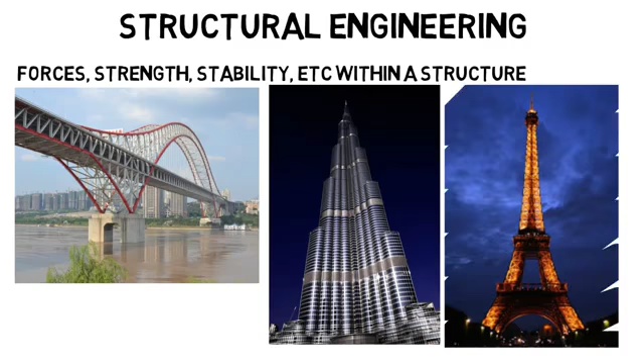So first, structural engineering is about calculating and understanding the forces, strength, stability, and so on within a structure. It could be a bridge, a skyscraper, a landmark, or even a spacecraft or aircraft. Remember, these structures are very heavy and need to support their own weight so that they don't collapse. Now this subfield is the most math intensive and has lots of physics.

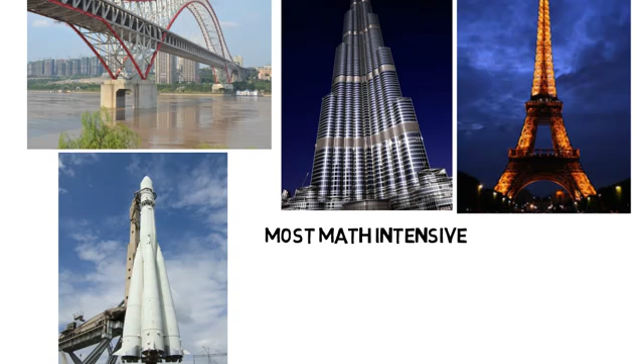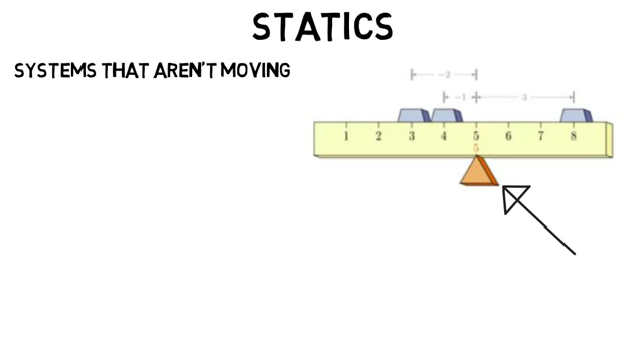All civil engineers will take a class called statics, which is all about the forces and systems that are not moving. In basic physics, you may have done a statics problem, like where does this support have to be for the system to be totally balanced and therefore not moving. You summed all the forces which equaled 0 and all the torques which equaled 0. And that's the basics of statics.

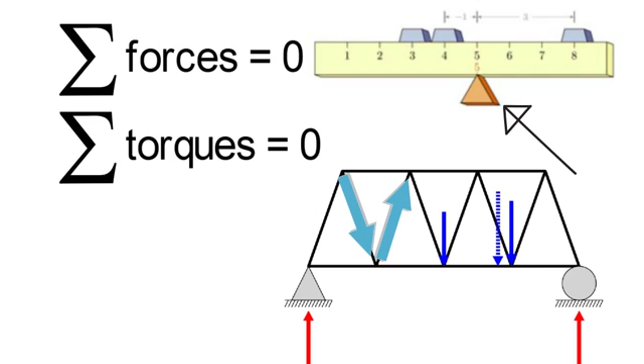So if you're looking at the forces within a bridge or truss, well, the same principles apply, but now there's just more to it. The weight is straight down as shown in blue, all the beams exert forces on one another, but the sum of them is equal to 0, and the torque sums to 0 as well because the bridge is not moving. And it's of course even more complicated than this, but if you enjoyed that kind of basic physics you see above, then you'll likely enjoy the statics and physics you see in structural engineering.

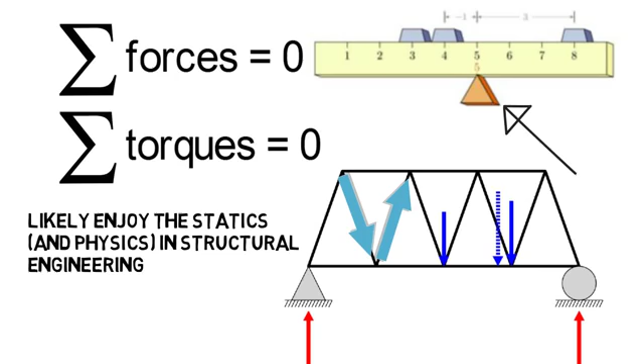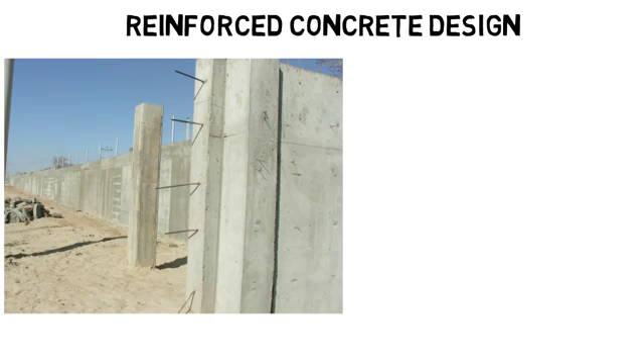So that's just a very simplified explanation, but now let's dive into some of the classes they would take. One class that would be important for structural students is a reinforced concrete class. In concrete structures, they reinforce it by putting steel beams in the concrete. We can't see those beams, but here, before construction is done, you can see them sticking out. Or you can see a lot of them on these unfinished columns.

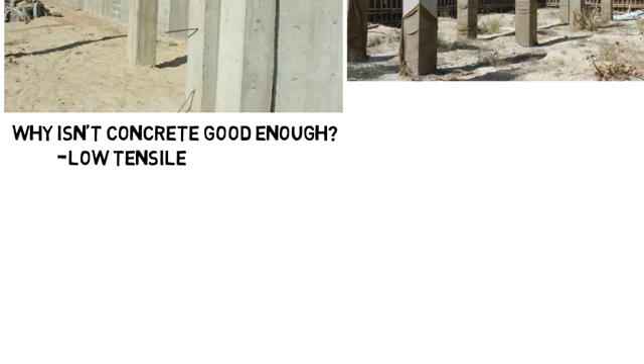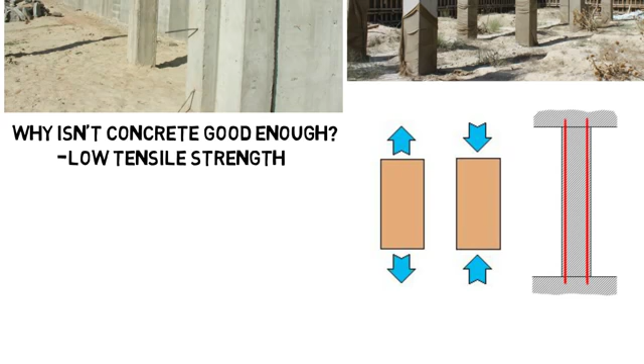So why do they do this? Why isn't concrete good enough? Well, concrete alone, once hardened, has low tensile strength, as in it does not handle being pulled very well. However, it's okay with being compressed. But to counteract that low tensile strength, they add steel beams and pour wet concrete, which hardens around them, and then those steel beams have high tensile strength to counteract those types of forces on the structure.

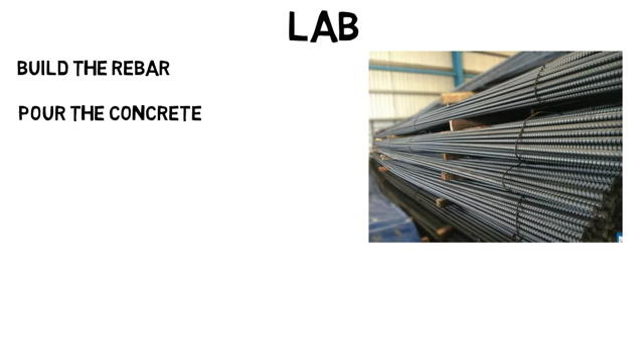So in a lab for this class, you might build the rebar, or the steel reinforcing rods, pour the wet concrete onto them, then once it dries, use a machine that holds the beam on both sides, then apply forces in the middle and keep increasing the force until the beam breaks or cracks and starts falling apart. That force being applied is sent to a computer that tells us the loading on the beam so we can collect the data and get the properties that we need.

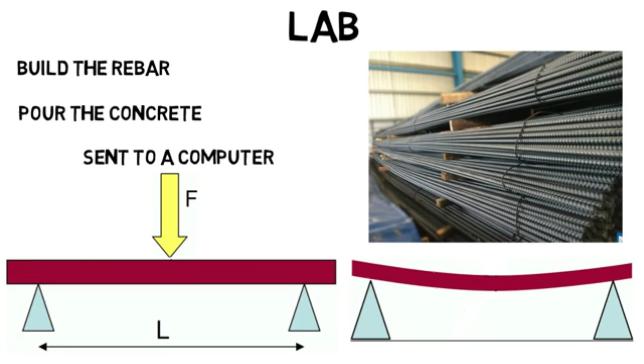You could take structural dynamics as an elective class. Dynamics is about moving systems, unlike statics. So this is one of the few classes where motion is included. So whether it's wind or an earthquake that shakes a building, you need to know how that motion will impact the structure itself and all the forces within it.

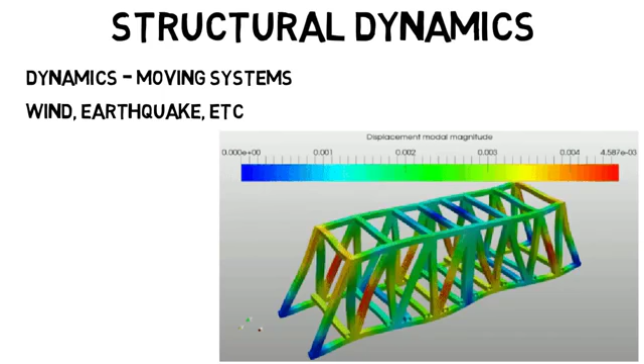I've shown this animation before, but mostly for mechanical engineers as it's a vibrating system that they could analyze, but civil engineers could get into this as well. They have to make sure their designs can stand up against any type of movement the structure may be subject to. You could take an elective class on seismic analysis, which is specifically about calculating the responses of a structure to an earthquake. Or one on bridge engineering, which would be a class on highway bridges, materials used, distribution of loads, and how forces are spread throughout the structure, and so on.

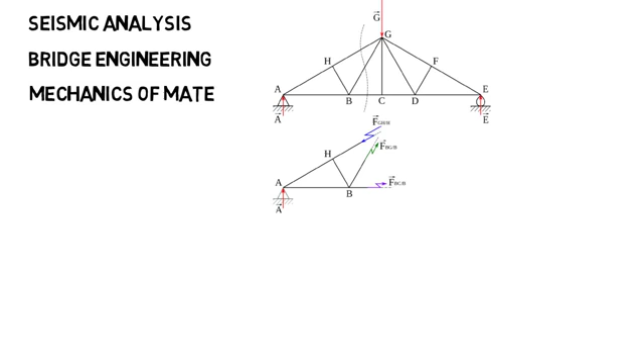Mechanics of materials, like how twisting and bending a beam or column causes it to become internally stressed. Timber structure design, which is about analyzing properties and forces within wooden structures, and much more. See how even if you choose structural engineering, you could still take many different classes from the other structure students? It's a very broad major, but hopefully you really get the idea by now. Lots of physics in this discipline, but mostly statics or forces in structures without movement.

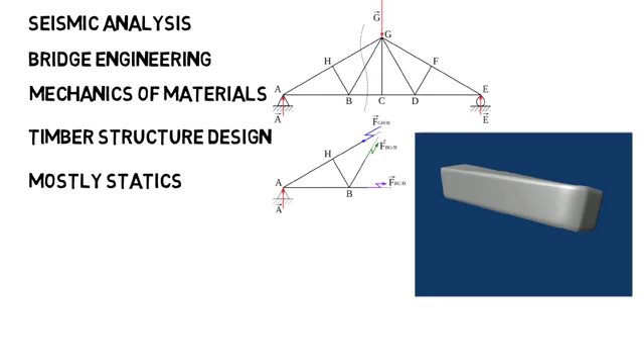You may still have to do hand calculations, but most of the rigorous analysis you learned in school will be left to the software.

Now let's move on to geotechnical engineering, and you'll already see how different these disciplines are. Geotechnical engineers are concerned with the behavior of earth materials like rock and soil, but the main focus is soil. This may seem odd, but you'll see how important this is.

The structural engineer can do everything right to make sure the building will stand up, but if the geotechnical engineer messes up and you put a structure on soil that can't withstand it or is uneven, the building could fall, sink into the ground, or even lean to one side, probably the most famous being the Leaning Tower of Pisa, which was a result of soil issues.

Then they also have to consider the foundation of the structures that are being designed, like should they have a shallow foundation or a deep foundation. You may not realize it, but our houses and all the buildings you see have foundations that go underneath the earth to keep the structure as stable as possible by transferring the weight from the structure to the earth.

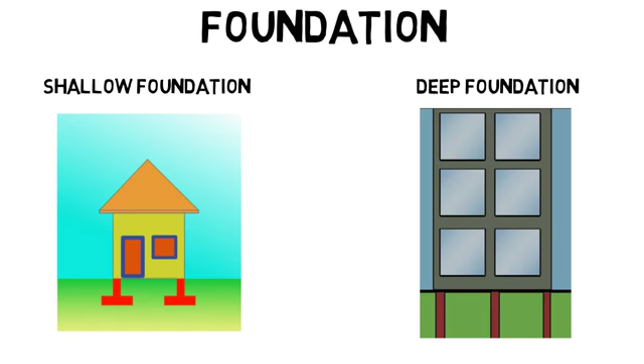But geotechnical engineers rely heavily on testing. So a lab you might see in college is to go out as a class and collect soil samples around your university and bring them to lab. You would have to classify it, like is it sand, gravel, clay, etc. There are many soil types, and you may have to look at the grain size or how it reacts to water.

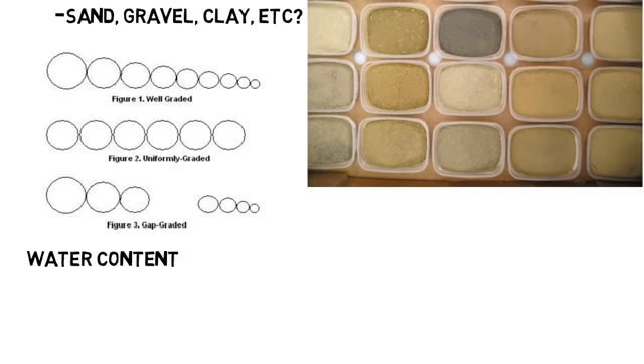You determine its water content by analyzing the sample, which will be comprised of solid soil, water, and air of different masses and volumes. But most importantly, you'll measure how the soil will react to mechanical loading or to different forces acting on it. So you might perform a triaxial test, for example.

Too complicated to explain for this video, but essentially you put the soil in an enclosed area and apply a force or load to the top which pushes down on the soil. Then pressure sensors measure the pressure at different points to see how the soil is being affected.

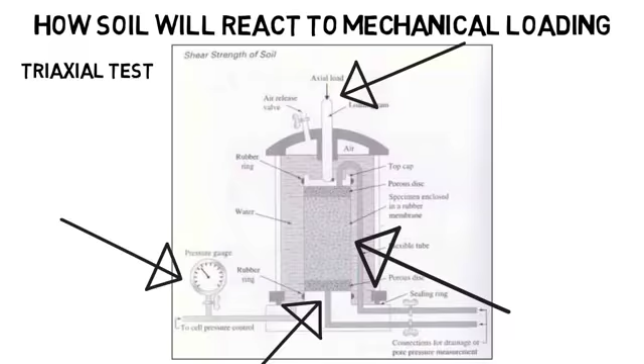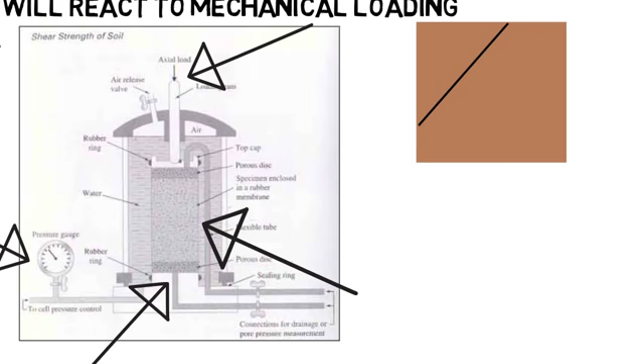If you imagine a square sample of soil and you add a force to the top, the soil can fail along some weak plane. Basically, the weight overpowers the friction holding the soil particles together, and the soil will start to slide, which is known as shear failure. Its ability to stand up to this is known as shear strength, which is one thing that the triaxial test on the left tests for.

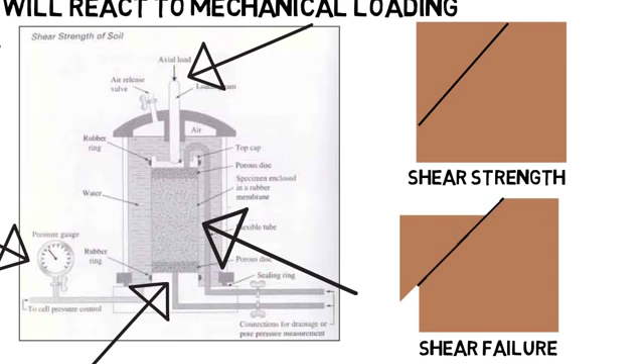And this leads us to what a career in geotechnical engineering could be like. You might be the person who goes out to the field where a structure is going to be built and collects soil samples all around the area for testing. Or you could do testing at the field.

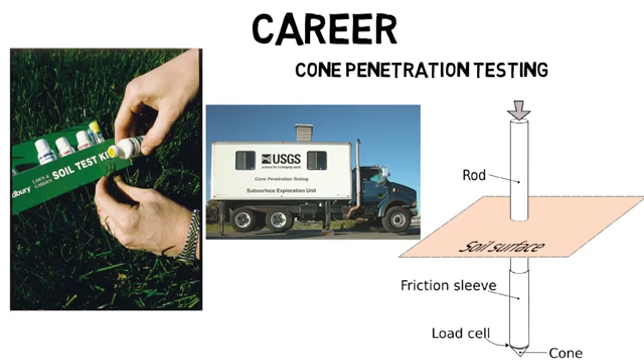One of the most used tests right now in this field is cone penetration testing, where a large truck goes out to the field which has all this equipment on it, and a cone is pushed into the soil, and the pressure will be monitored by a computer on the truck as it moves through the soil into the earth. Based on the pressure, you can analyze the soil mechanical properties.

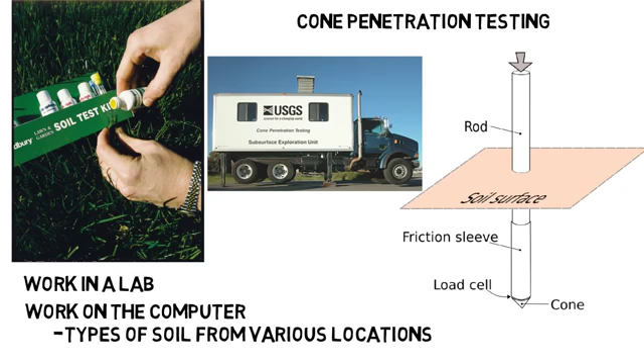Or maybe you could work in a lab where you would do the testing on the soil after it's been collected, like I showed with the triaxial test. Or maybe you could work on the computer and input the different types of soil from the various locations at the site so you can digitally lay out the area that the structure will rest on. So you could be in the field, in the lab, or on the computer.

Your elective classes could include geotechnical earthquake engineering, which would be like learning the dynamic behavior of soil as opposed to the structure itself. Then slope stability analysis and how to safely design structures on slopes. An example would be an embankment dam. Analysis of deep foundations, where the structure goes deep into the earth for a stronger support, like for skyscrapers. And of course, there are many more classes.

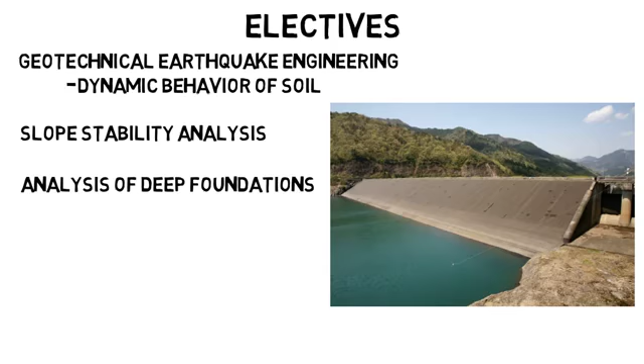Now let's move on to water resources engineering. This is about the design of systems to manage human water resources. They can work on a water treatment facility, designing dams, pipelines, channels, canals, and so on. Maybe you have to design a storm drain system in the event of a large storm. Where is all the water going to go and how will you get it to the ocean efficiently?

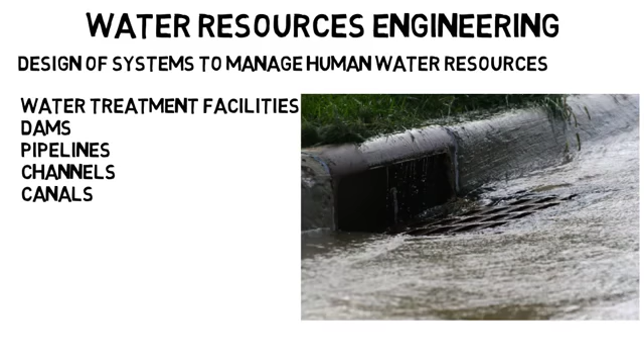Or you could design a canal, which is an artificial waterway to transport water for irrigation, or it can be used for ships and boats. Or you could design a culvert that will allow water to flow under a road or trail or some other obstruction.

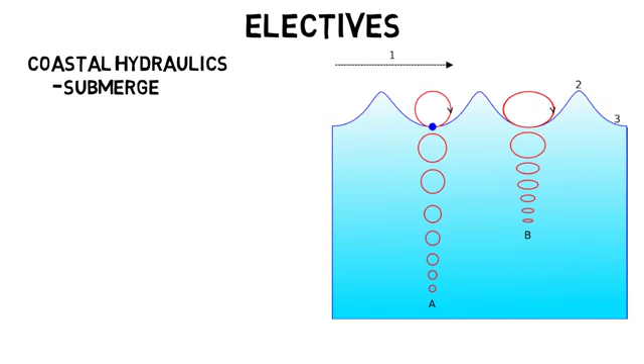Elective classes you could take include coastal hydraulics, where you learn about ocean wave propagation, submerged pipelines, seawalls to protect human habitation, and so on. Or open channel hydraulics, which is about fluid flow in an open channel as opposed to a closed channel or pipeline.

And last is transportation engineering. This is about safe and efficient movement of goods and people. These are the engineers who design streets, roads, highways, railroads, public transportation systems, and even airports.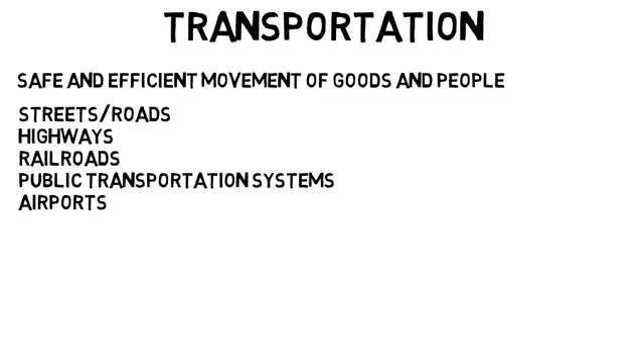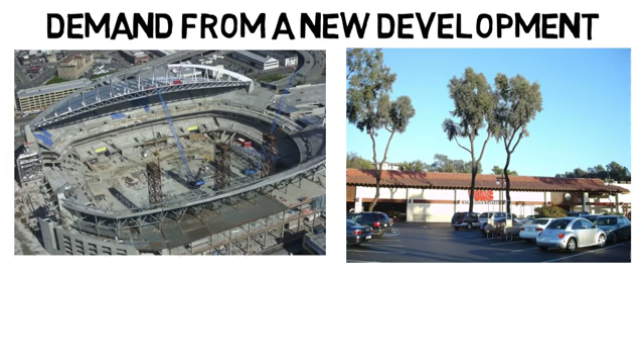So maybe this engineer has to look at the kind of demand from a new development, whether it's a new stadium in your city, all the way to a new grocery store in a new location. This is going to cause new types of traffic throughout the area. The engineers would try to optimize how the new development impacts existing traffic.

They would look at data from other similar places to see what kind of traffic they get, then try to make improvements where possible. It could be simple like adding a bus stop in the nearby area, all the way to expanding the roadway to allow for more traffic.

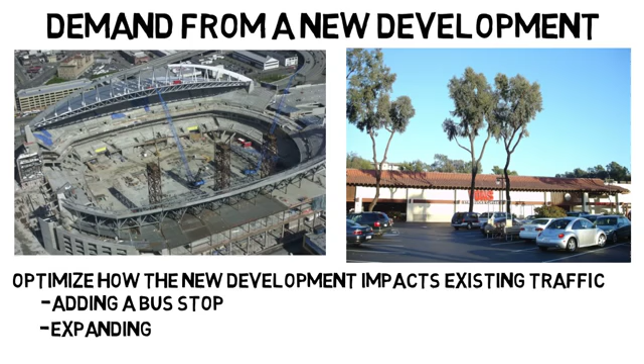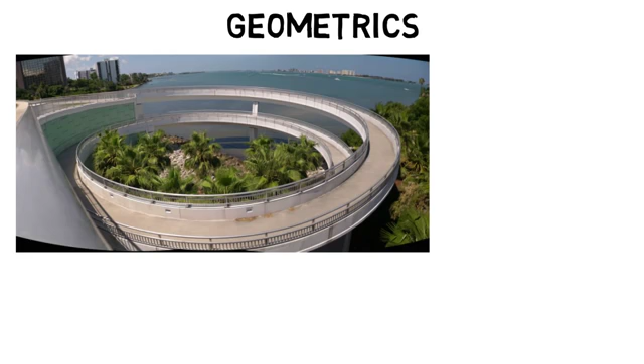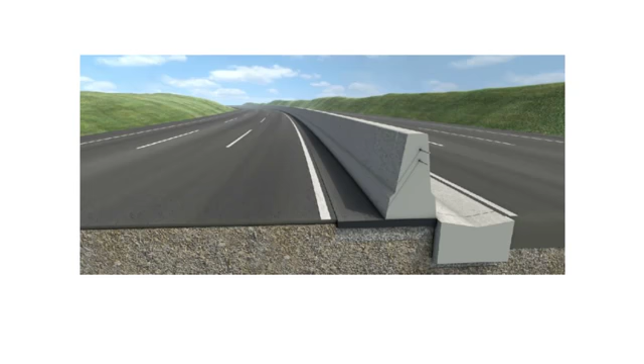They could work on the geometrics of the roadway, such as what radius of curvature does an off-ramp have to be for a car going 55 miles per hour so the tires won't slip. Or if they're going up an incline, the driver needs to see far enough ahead of them to stop if there's a sudden obstacle. Or what do the cross sections of a freeway need to be for the lanes and the shoulders to accommodate the amount of traffic that's expected?

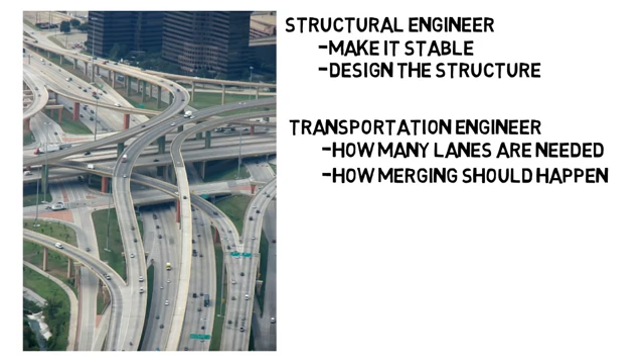Or let's say a highway interchange is being designed. A structural engineer would make it stable and design the structure itself, but the transportation engineer would determine maybe how many lanes are needed for the interchange based on traffic, or how the merging should happen to maximize safety. They make sure that the layout is designed to maximize traffic flow and safety rather than the physics of the structure itself.

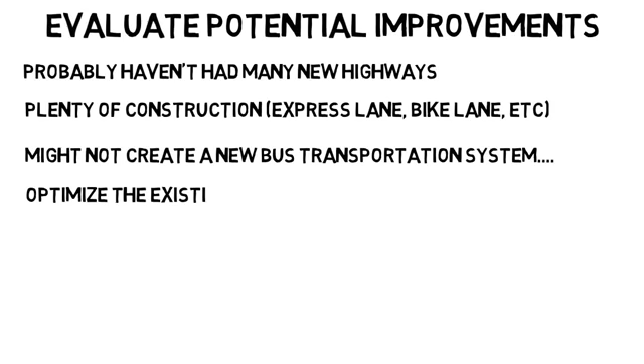Often these engineers evaluate potential improvements to cities in terms of transportation rather than create a totally new design. As in, you probably haven't had many new highways put into your city in the last few years, but there's probably been plenty of construction, whether it be adding an express lane or a bike lane, etc. So they might not create a new bus transportation system, but they may optimize the existing one. Maybe they take data from how many people get on the bus, how long the bus takes to complete its route, how long people are waiting for the bus, and so on to optimize the route, the amount of stops, and more.

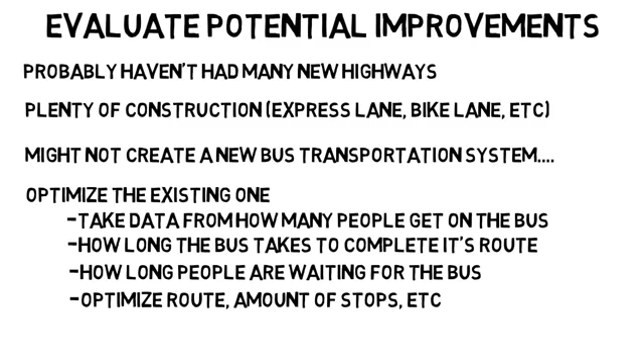Your career will also likely involve a good amount of computer work. You might have to create a layout of the new lane, off-ramp, bridge, or whatever you're designing on AutoCAD, which is a very important software for civil engineers. Or you could use software to analyze and simulate traffic.

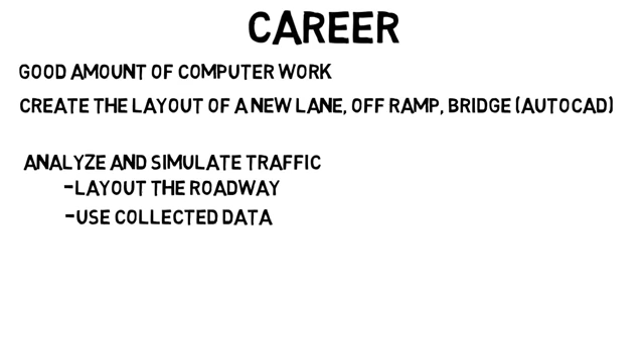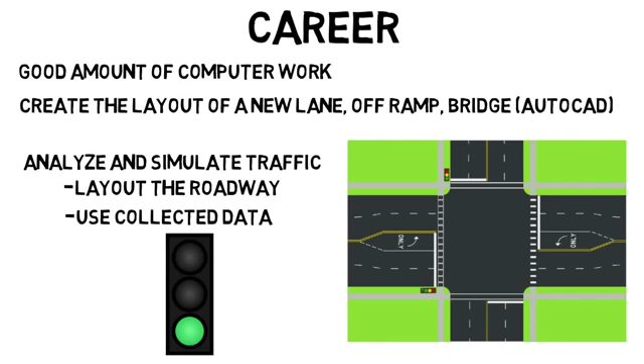You could actually lay out the roadway of a city and use collected data of traffic during different times of the day and simulate new additions. Like you could add in a stoplight somewhere and see what the new traffic would be like. Or you can make a minor change, like make a certain stoplight stay green for just a few seconds longer and see how it affects traffic on those streets.

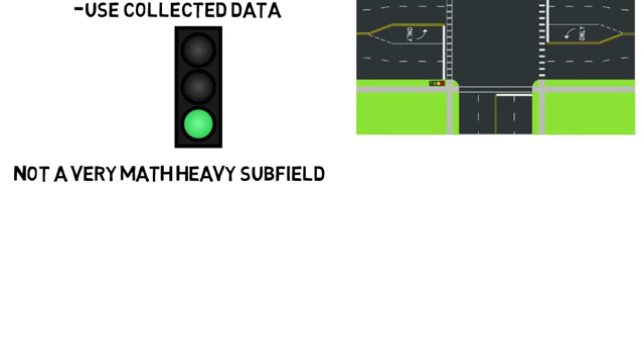And just note, this is not a very math-heavy field. In fact, it's probably the least math-intensive of the 4 subdisciplines I've talked about. It's more about taking data and analyzing it. Even when I talked about the radius of curvature and how fast someone should be going, you won't use the coefficient of friction and do circular motion physics or anything like that. You use even simpler equations to get what you need.

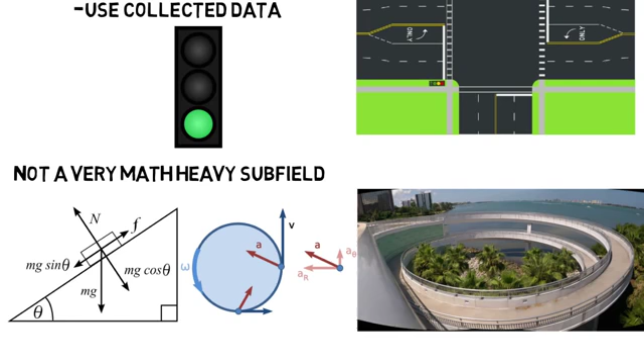Now that's all the main subdisciplines of this major, but there are some final thoughts I want to include. If you're watching all this and are more interested in the artistic aspect of building and structure designs, then architecture will be better for you. Architects deal more with the floor plans, spatial concerns, and the shape and design of the buildings. They have to have an understanding of structures and physics, but not quite as much as a structural engineer.

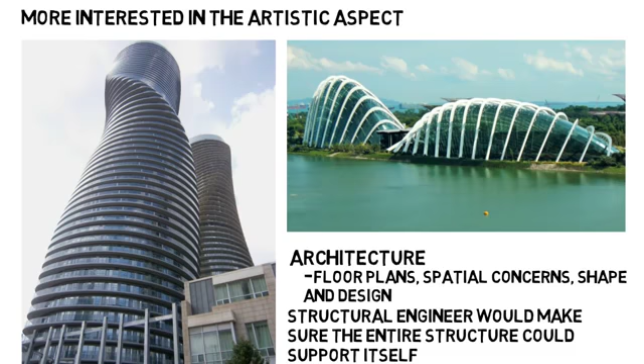They would hand off their design to the structural engineer, who would really make sure the entire structure could support itself, and they would deal with more of the technical work. Then, if you want to be the one who puts on the hard hat and does all the hands-on work with the machines and physically builds the structures, then construction will be better for you.

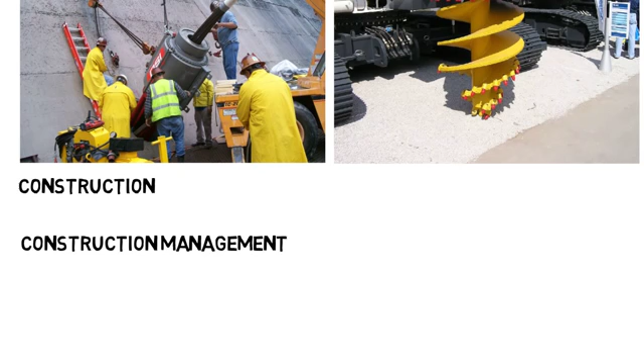But then there's also construction management, which you can still get a job in as a civil engineer. Construction companies will hire civil engineers because of their technical background. Construction is the hands-on part, but construction management is more about guiding the construction, putting together schedules, budgeting, and figuring out how all the pieces will come together.

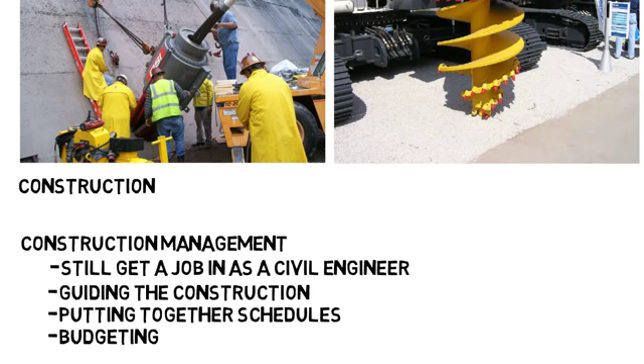And according to the Bureau of Labor Statistics, the average salary and the number of jobs in the United States for these 3 majors are all pretty good. Of course, these are just averages as of now, but hopefully this gives you a good idea of what you can expect.